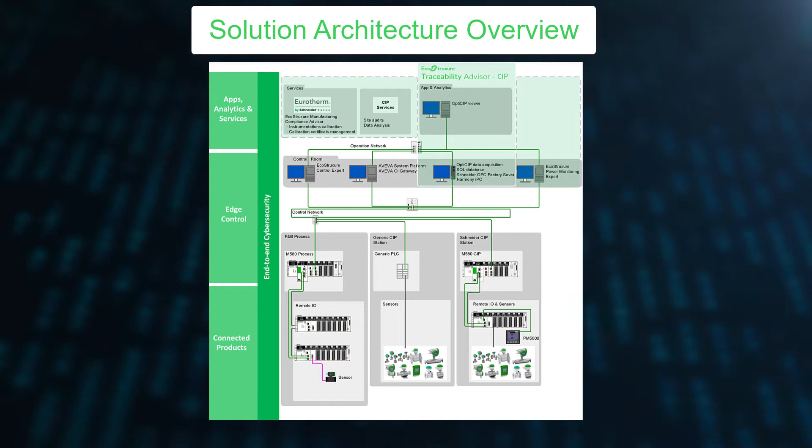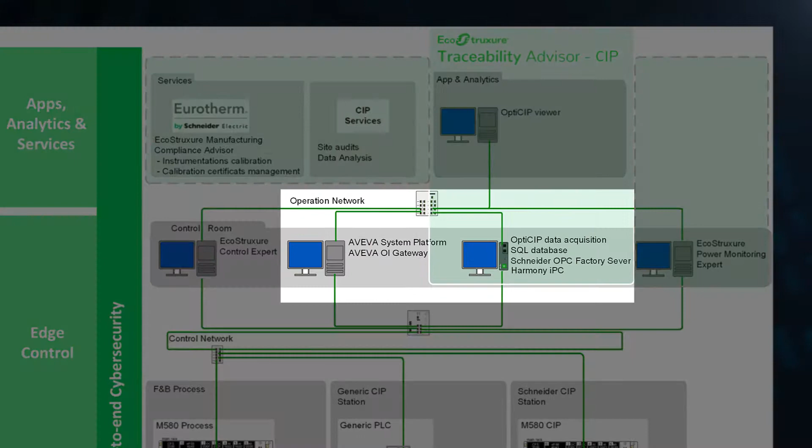Connected to existing Clean-in-Place automation equipment, the solution is PLC agnostic. The architecture proposes the best option, leveraging M580 combined with AVEVA System Platform directly connected through OPC to the EcoStruxure Traceability Advisor - CIP.

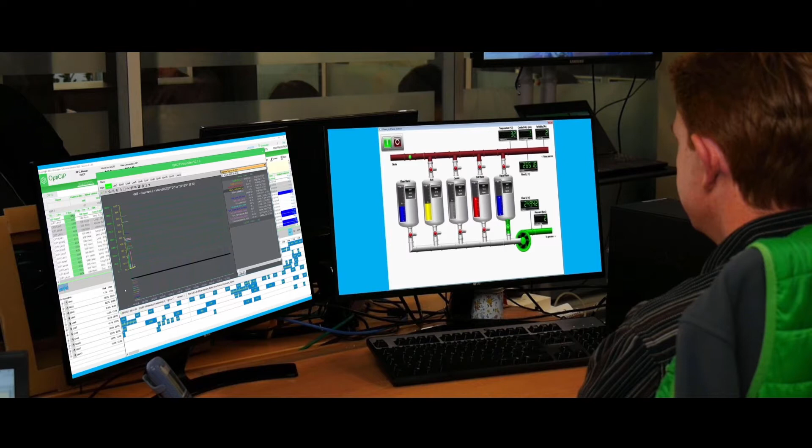For the demonstration, we selected a common use case of Clean-in-Place operation in a dairy factory producing bottles of milk. The Clean-in-Place station is configured to implement cleaning sequences on several milk bottling lines. We have lines for differently sized bottles and different varieties of milk. Clean-in-Place optimization is crucial for this process to help enhance food safety and improve production efficiency.

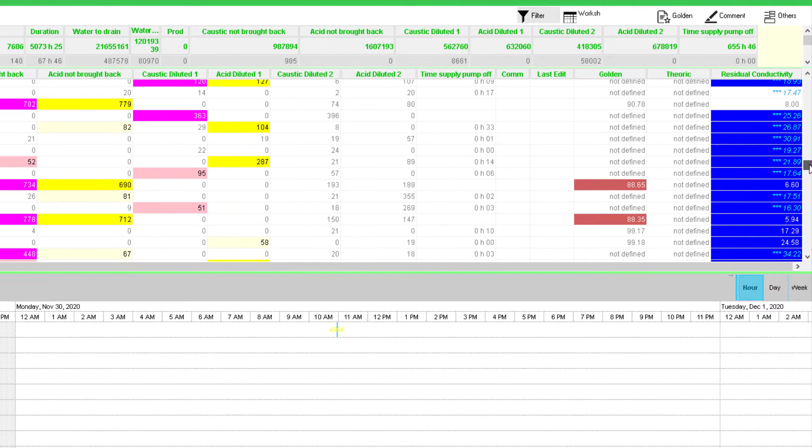The advisor provides a set of digital reports customized for Clean-in-Place, with the capability to track cleaned object, recipe used, quality score according to deviation from reference, residual conductivity and turbidity, and many other KPIs. This helps users move to Quality 4.0, meaning that all quality data are available at any time in digital format to document the evidence of proper cleaning.

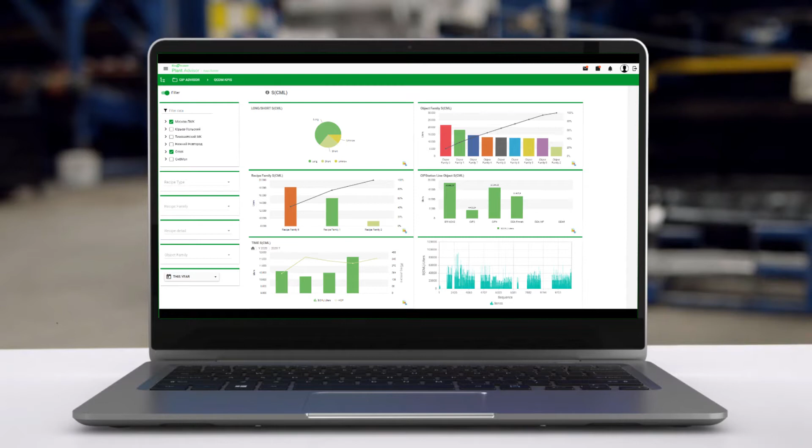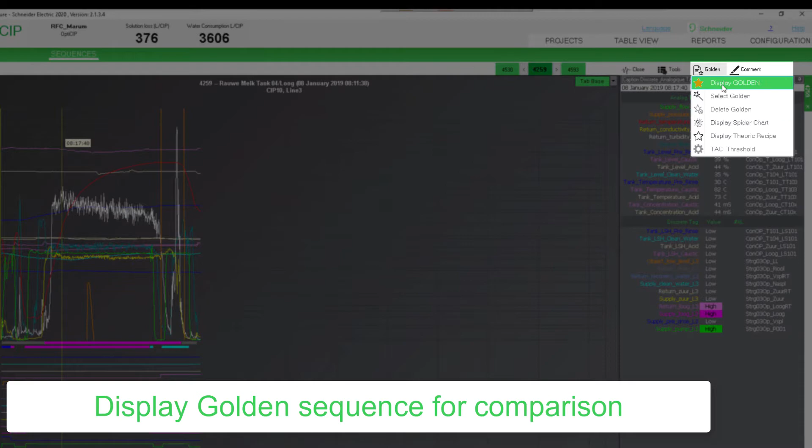The Clean-in-Place database openness in this solution and the additional dashboarding module bring flexibility in proposing multiple angles for CIP analysis and comparison across large amounts of data. Based on a theoretical sequence for each recipe and object, a golden cleaning is defined. In a single click, the curve of the golden sequence is displayed on the trend view to compare the actual measurement to the CIP reference.

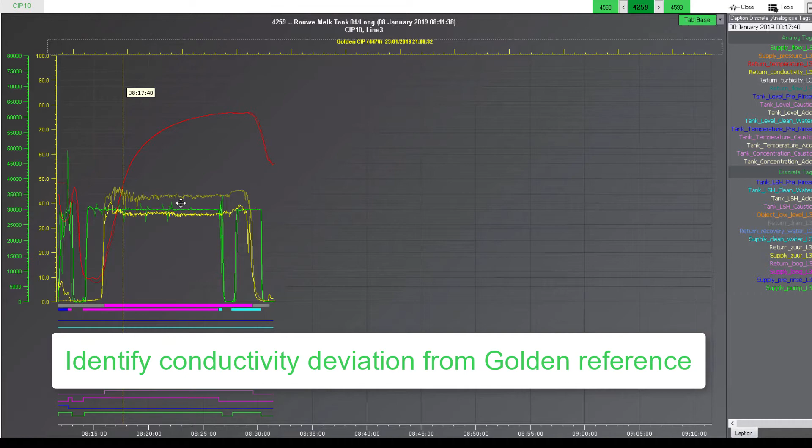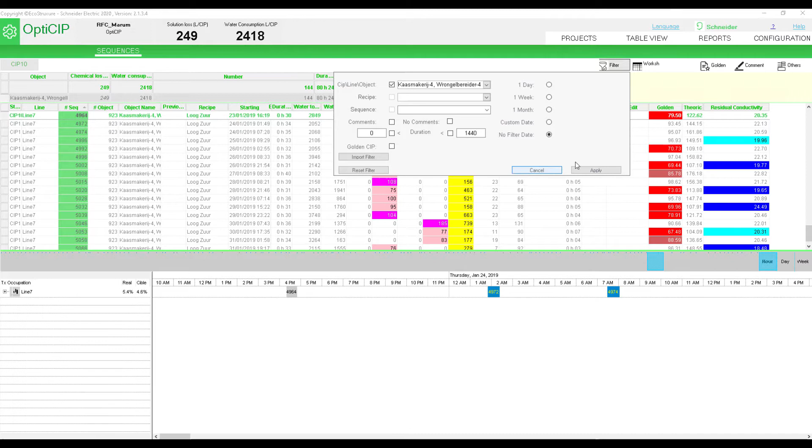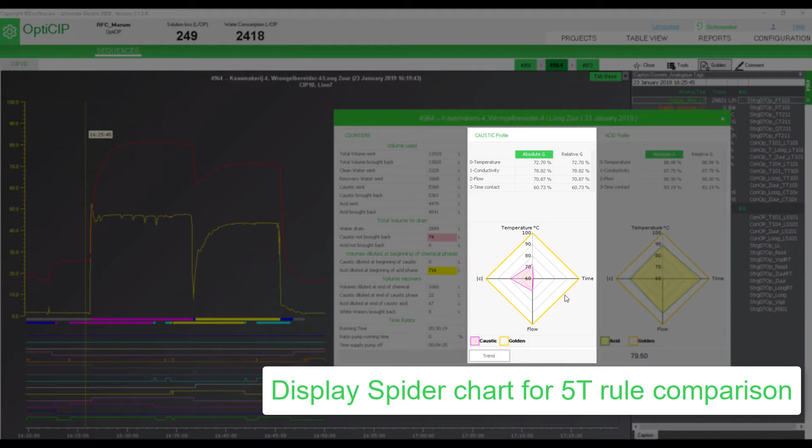The operator can select to display the sequence spider chart that focuses on caustic and acid phases. It's a quick view to deepen the diagnosis on the 5T rules when there is a deviation from the golden CIP sequence. This sequence shows important deviation on the caustic phase, especially on duration, which is far from the expected value for proper cleaning.

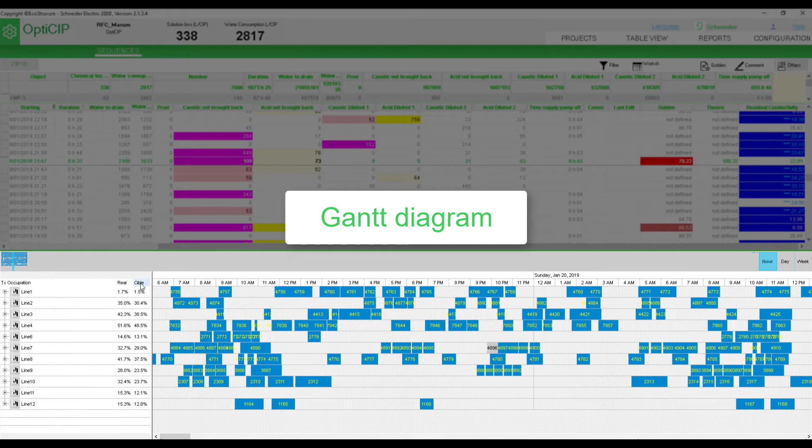To confirm the maximum time is allocated to production, the advisor monitors the load of CIP lines, helping users better allocate Clean-in-Place operations and manage the load of CIP stations to reduce production downtime. At the bottom of the main view, we have all sequences displayed on a Gantt chart with all traceability information and direct access to the sequence measurement.

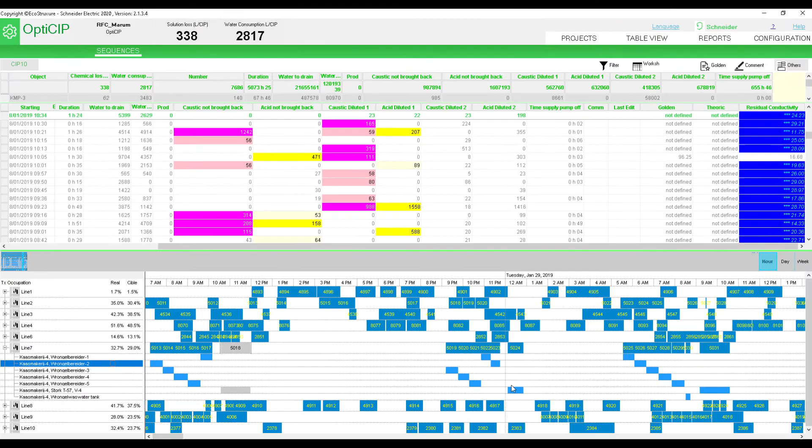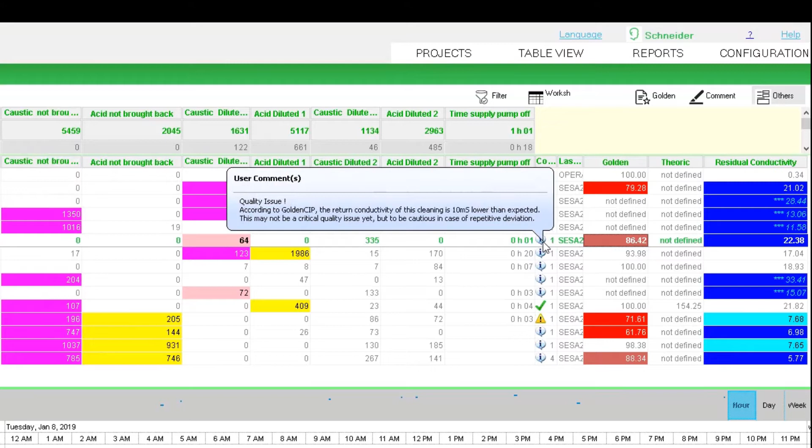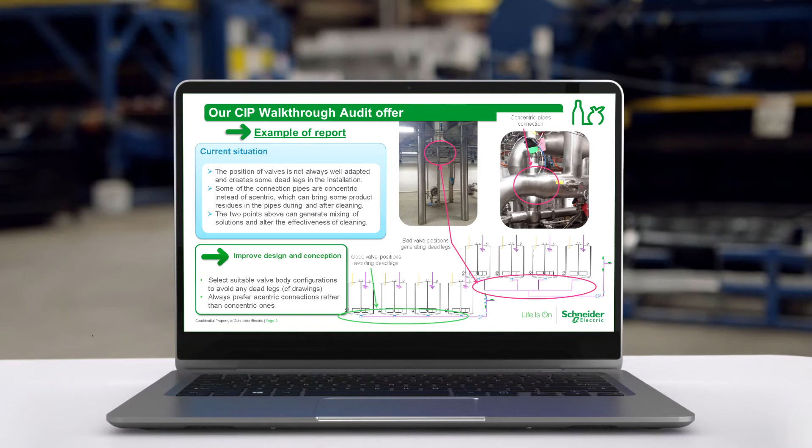The advisor computes the golden score for each line with reference to a pair of recipe and object. Monitoring the golden is the best way to track deviation and confirm the standardization. Audit and Clean-in-Place services from Schneider Electric are part of the solution to make sure operations comply with regulation and standards. Schneider Electric Clean-in-Place experts will bring methodology and best practices to simplify operation and follow best-in-class standards.

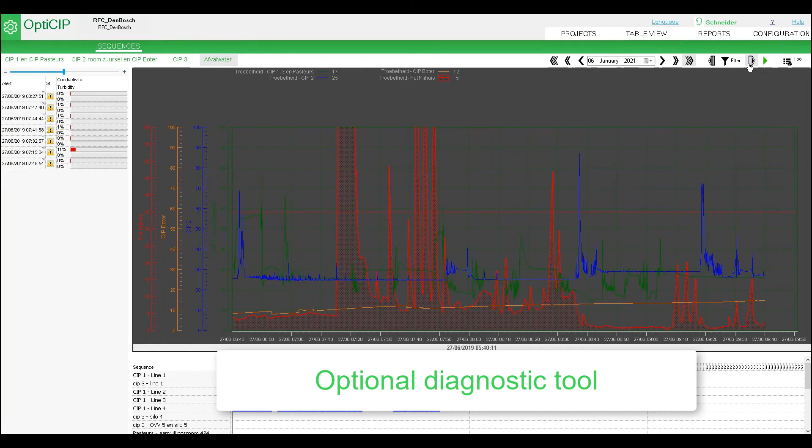By design, the Clean-in-Place Advisor offers the best interface for Clean-in-Place data analysis. The solution example demonstrates a typical use case that analyzes and identifies losses and associated causes. This product loss monitoring is proposed as a complementary feature. It provides an additional diagnostic tool helping Clean-in-Place users to track food losses going to drain and accordingly reduce spikes of chemical oxygen demand (COD) in wastewater treatment plants.

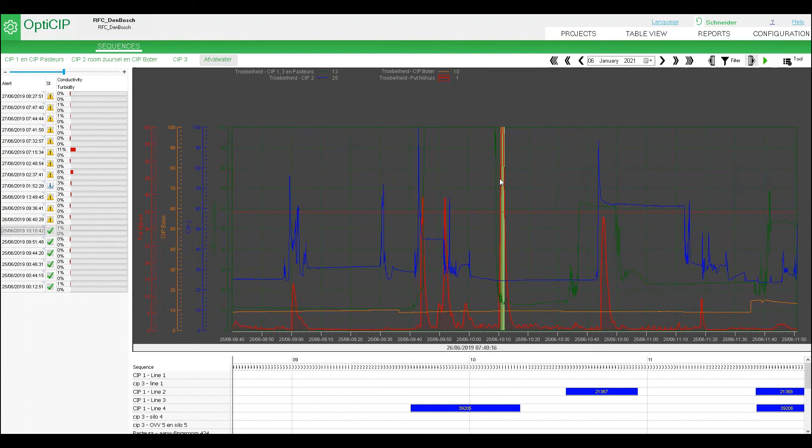EcoStruxure Traceability Advisor - CIP can work in synergy with additional tools like Power Monitoring Expert to easily create and embed dedicated dashboards for energy consumption related to CIP operation. This energy monitoring contributes to lower carbon footprint and sustained savings.

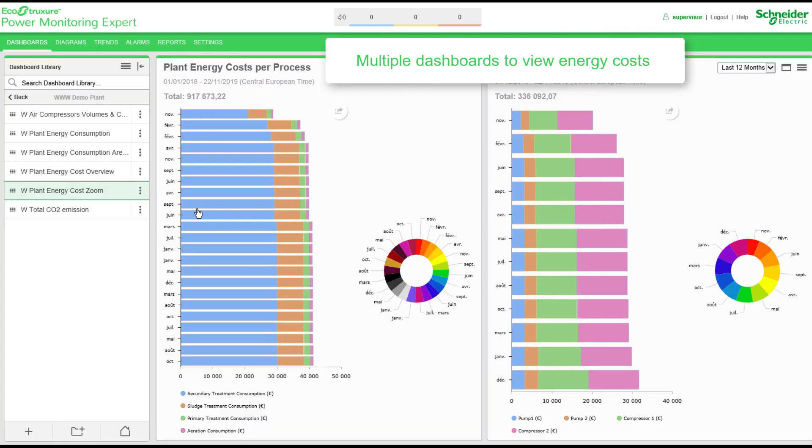The Schneider Electric Clean-in-Place optimization solution offers advisor and services to help you rise to those challenges. CIP experts can assist to diagnose, simplify, and standardize your CIP operations while reducing cleaning operation time and resources. Let's move to CIP 4.0 for more traceability, better quality and efficiency with the EcoStruxure Clean-in-Place solution.